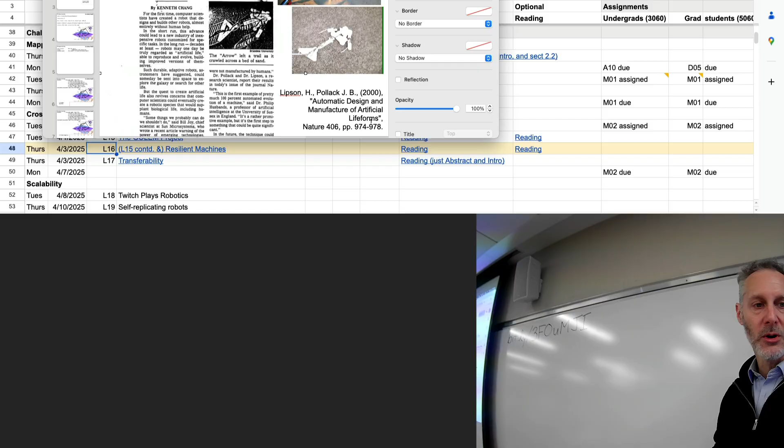We saw last time that in the GOLEM project, they're going to evolve not just synaptic weights for control policies in a fixed robot. They're going to expand their evolutionary algorithm to evolve both the body and brain of their robots. And we're going to see more and more of that towards the end of this semester.

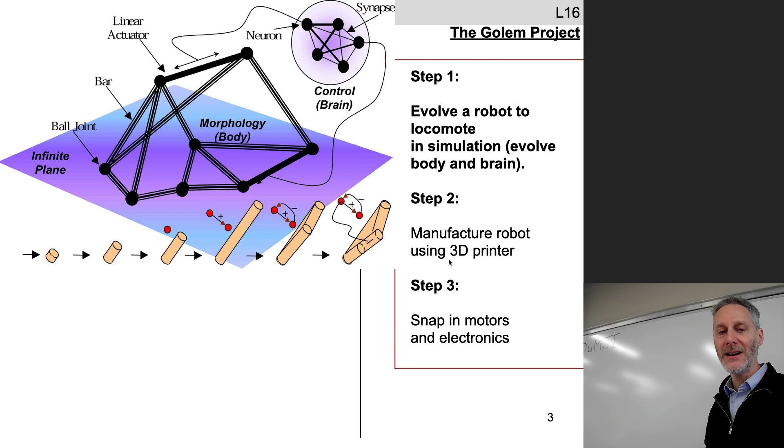Step one, evolve a robot to locomote in simulation like we've seen before by evolving body and brains. Step two, manufacture as much of the physical robot as can be manufactured by a 3D printer. And then whatever the 3D printer can't manufacture, snap that in manually. So partly automated manufacture of evolved robots.

Okay, we walked through the genotype last time. In the GOLEM project, there's a relatively complicated genotype-to-phenotype mapping. We started to talk about the evolutionary algorithm last time.

Instead of starting with random genomes, they start with null genomes. They have 200 null robots. Every single one of those 200 robots has no vertices, no bars, no motors, no neurons, no actuators, and so on. We ended last time by talking about the evaluation period.

How long does one simulation run? They have a CPG in one of these neurons. Every robot has its own CPG that emits a sinusoidal pattern that can be used by the motors, and that CPG is allowed to oscillate 12 times.

Some of those survive by chance, some of those are killed off, and then the ones that survive produce randomly modified copies of themselves.

What's the point of having half of them get killed off before any evolution takes place? Why make 200 empty genomes and then randomly kill off half of them? Seems like overkill. Why didn't they start with random genomes as we've seen before? Seems like kind of an odd experimental choice.

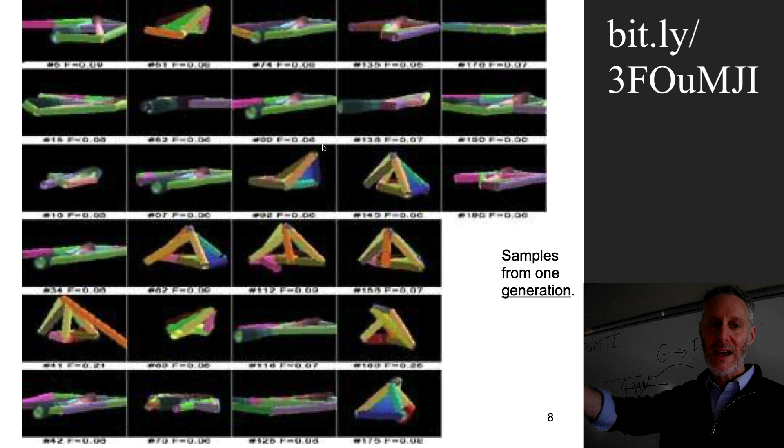Again, I apologize for the low resolution graphics here. Hopefully you can see—what we're looking at here is partway through the evolutionary process. They're doing a cross-section through the population of 200 robots partway through evolution, and you can see that there's a little bit of diversity in the kinds of bodies that are arising.

So we've got a population of different robots, but you can also see there's a little bit of common structure here. There are certain ways in which these body plans are able to move about.

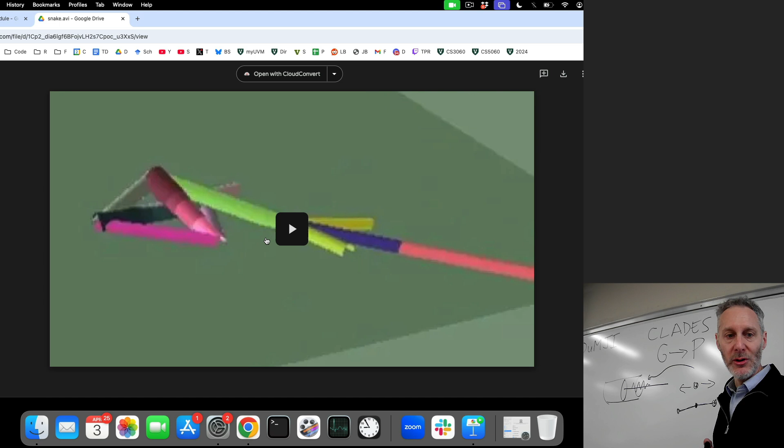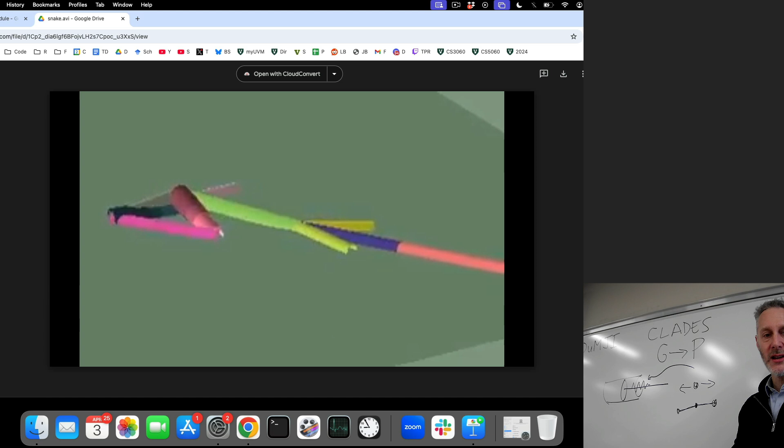You'll have to forgive the physics engines of this time, these were the very first physics engines. You can see they're not too accurate, there's a lot of interpenetration here, collision detection and resolution is a little rough. What do you think? Is this going to transfer from simulation to reality? I don't know about you, I'm not very confident. We'll see in a moment.

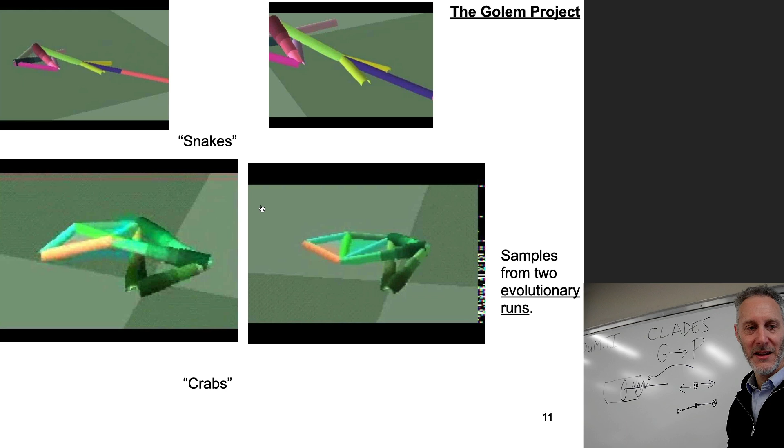This was one individual, and this was one of its cousins existing in the population. Looks similar, acts similar, not exactly the same. We should have a betting pool going: going to transfer? Yes, no, maybe. I see a lot of shaking of heads.

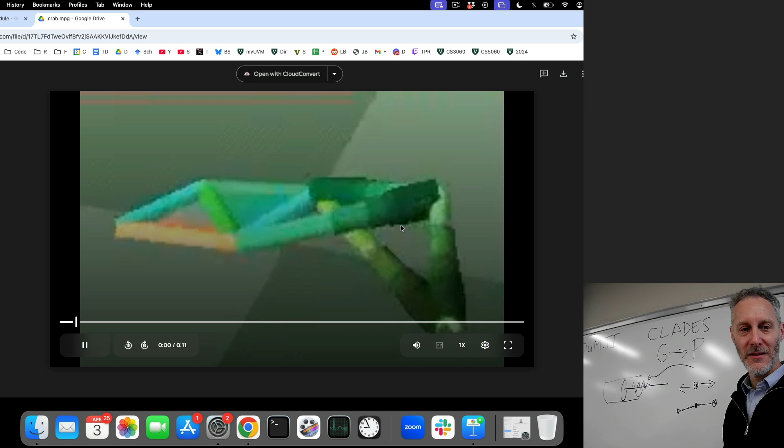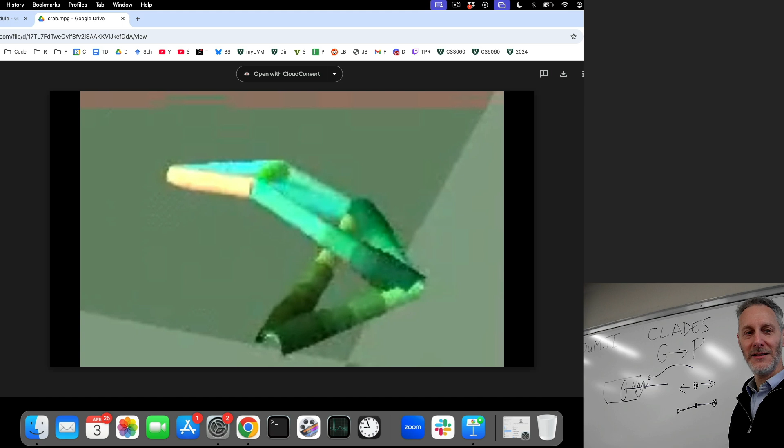Here's the crab. Yes, no, maybe, why not? All right, let's keep going. Another cousin of that one.

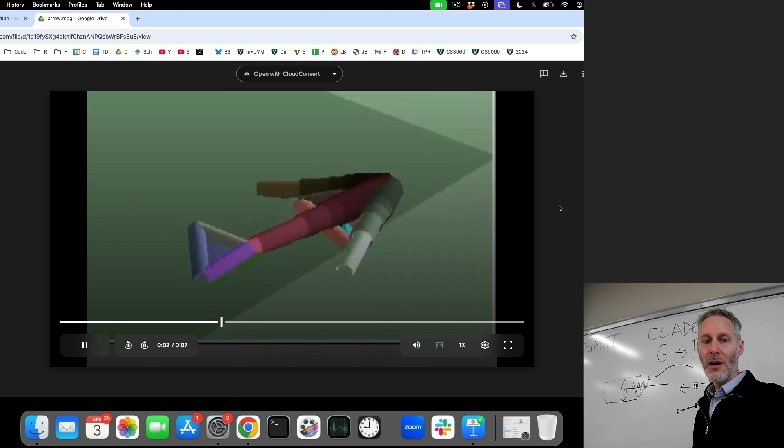Okay, let's see if I can play some of these. Here's the simulated arrow, and as pointed out, most of its motion is horizontal. You can see the friction modeling here, which isn't great, but it's good in the sense that it's slowing the robot down.

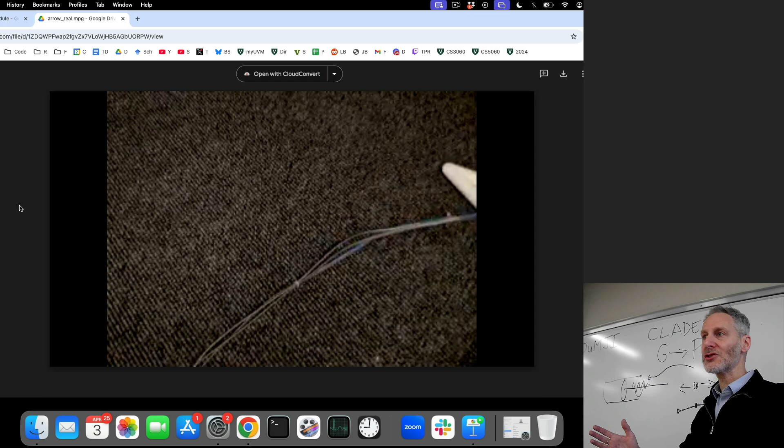That's the real arrow, still high friction. It's still doing more or less the same thing, exhibiting the same motion, moving in the correct direction, just slower. Not great, but okay.

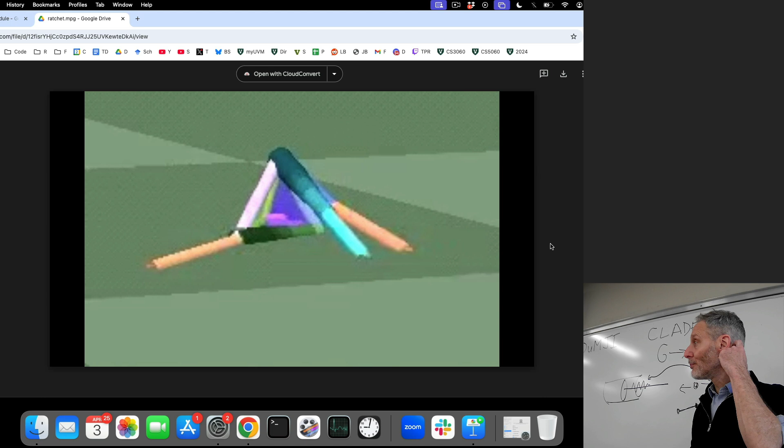Okay, the ratchet. It's pushing a little bit more vertically. There's more of a vertical component to the force acting on the ground, but clearly it's dragging a lot of its parts. You'll notice that the evolutionary algorithm has evolved to exploit the not-great collision detection and resolution. Let's see how this one does in reality.

Still a pretty simple machine. It's got kind of the right idea.

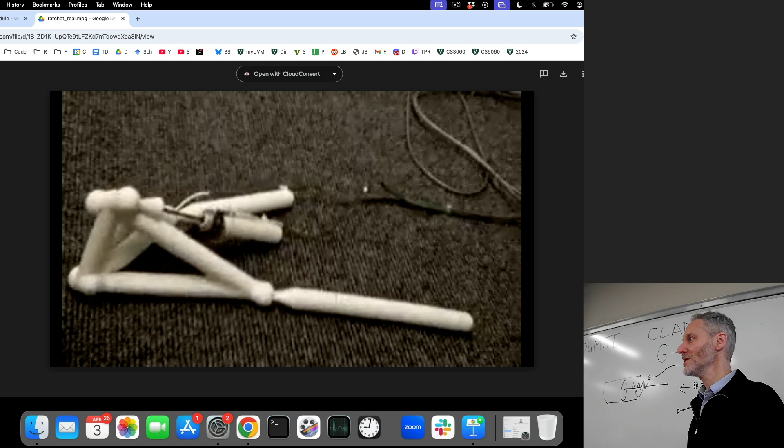Okay, and then finally, the tetrahedron. Vertical component of pushing. It's still dragging its components.

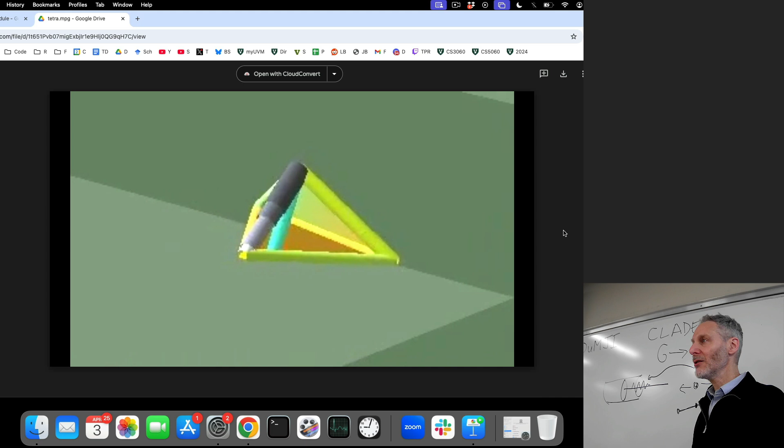What you can't see from this physics engine is that the total weight of the robot is being lessened. So it's still dragging the parts, but the parts are lighter when they're dragging.

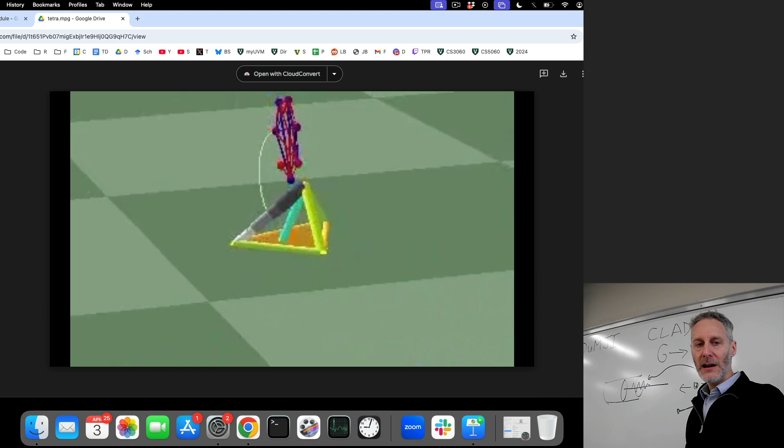They added in a visualization here so you can actually see the neural network brain at the same time. You can see the neurons firing, the synapses, and that white line sending a value to the motor neuron inside one of the actuated bars.

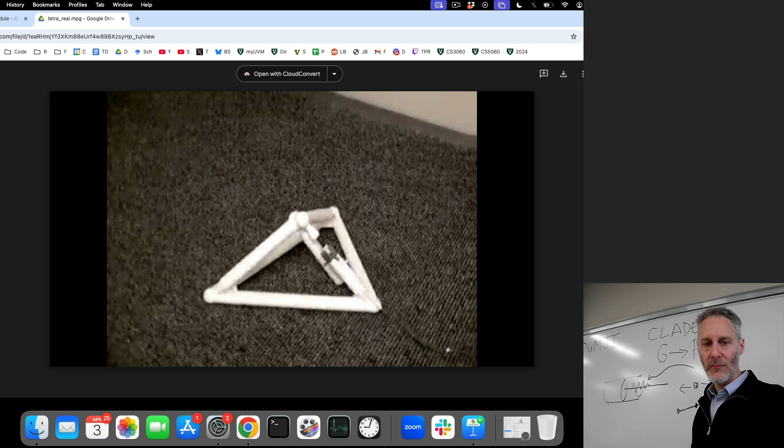They cheated a little bit. You can see the video sped up a little bit.

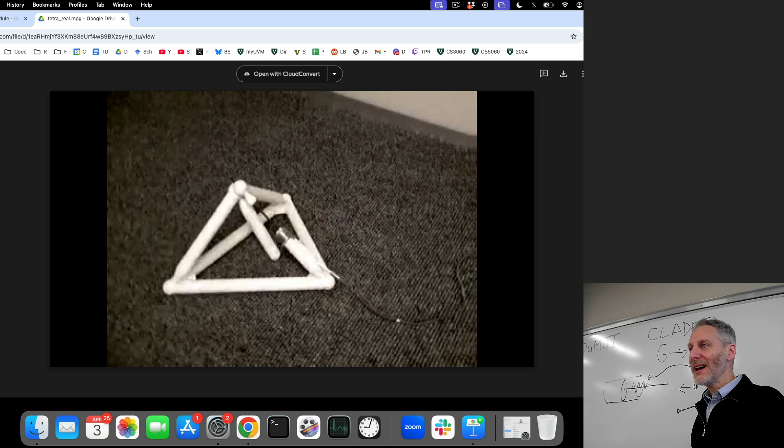Not the most complicated robots, but a demonstration, number one, that it is possible to cross the sim-to-real gap. And it is also possible, thanks to 3D printers, to automate the manufacture of these robots a bit.

So now that we've talked quite a bit about the GOLEM project, how does it try to solve the sim-to-real problem? It does it by assuming that, by creating diversity, lots of different robots with different form and function, hoping that at least one of them makes it across the gap. This is the radical envelope of noise hypothesis — the intuition is don't allow evolution to clamp on to inaccuracies in the simulation.

The intuition behind the GOLEM project: let's just make a whole bunch of them, and let's automate the manufacture of them so we can pump out a large number. And if any of them don't manage to cross the gap, throw them away, keep the ones that do.

Okay, so again, I mentioned a little bit about 3D printers. This is the very early history of 3D printers. You can see here there's a little bit of a nozzle. This nozzle goes back and forth over a horizontal plate and lays down some of this thermoplastic, which very quickly solidifies. You can see the robot being printed here, made up of these hollow cylinders.

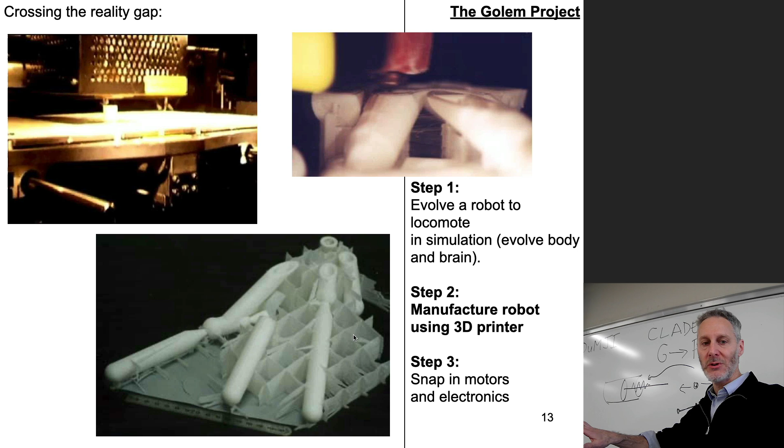You can see that depending on the geometry, the 3D printer needs to print a little bit of thin supporting thermoplastic structure. What they would typically do is print out one of these robots in the afternoon, then put it in a very lightly saline solution bath overnight, which dissolves away the thinner bits of thermoplastic and gets rid of the scaffolding, leaving you with the robot.

You'll notice that they came up with a relatively complicated and elegant geometric solution to create a hinge joint. The 3D printer doesn't print separate parts that someone then assembles — it prints the robot as one entire piece.

The nice thing about 3D printers is they can print relatively complicated and high resolution 3D geometry. So if you get the geometry right, you can print out things like 1-degree-of-freedom hinge joints. Here's the little electronics that they're connecting to the robot, and the robot kind of has to drag its brain along with it.

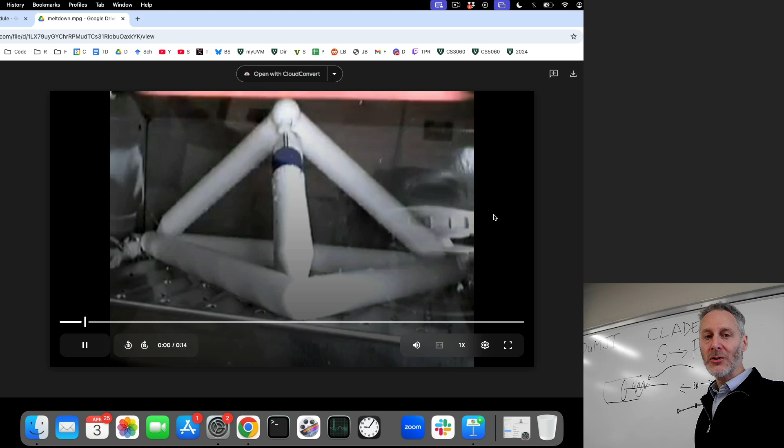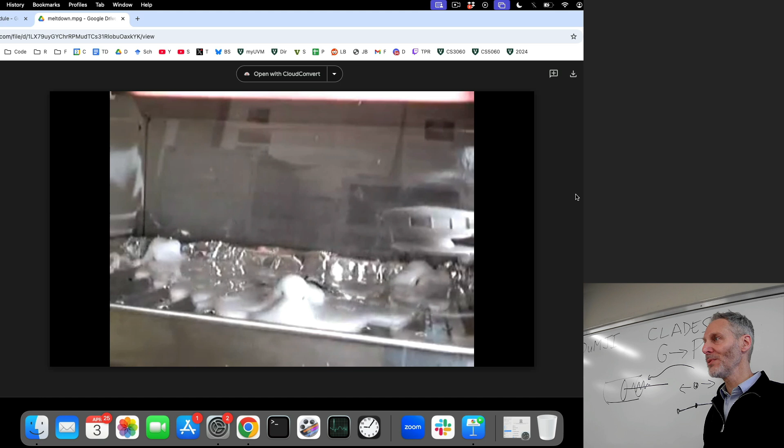At the time, people were thinking about what would be the use of these 3D printers. The idea was perhaps you could create recyclable robots — once the robot's done cleaning the leaves out of the eaves on your home, you throw it in your microwave, heat it up, melt all the thermoplastic, and send it back to the company, and it'll 3D print a robot for you.

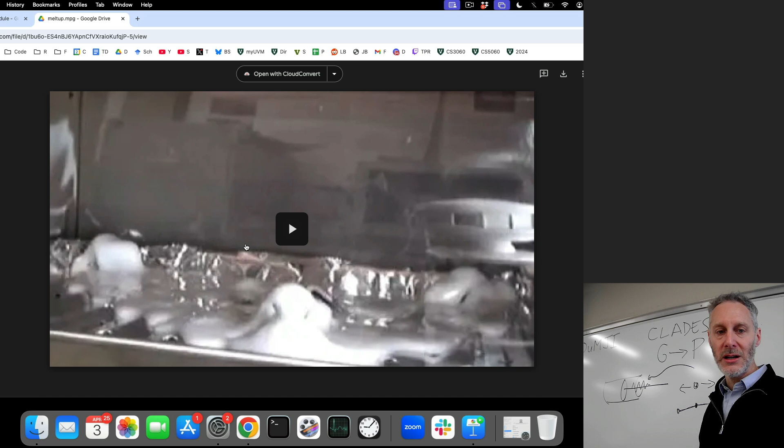And maybe you can even create a fancy microwave that builds one for you. These investigators were not without a sense of humor.

Okay, that was the GOLEM project, conducted at Cornell. I was there doing my postdoc when they were finishing up this project. One difficulty was working with these big, clunky 3D printers. So the investigators started a second project called Fab at Home, with the idea that you could perhaps open source 3D printing.

One of the things that led to the computer revolution in the 80s was the invention of personal computers, the idea that you could get people to buy a kit and put together their own computers, or buy a simple computer and use it at home. Nobody had any reason to think about why a computer would be useful for people at home.

People figured it out. So the idea in the early 2000s of the Fab at Home project was, let's try and get a 3D printer into everybody's home. How many of you have a 3D printer at home? Okay, that vision hasn't quite come about yet. Maybe someday.

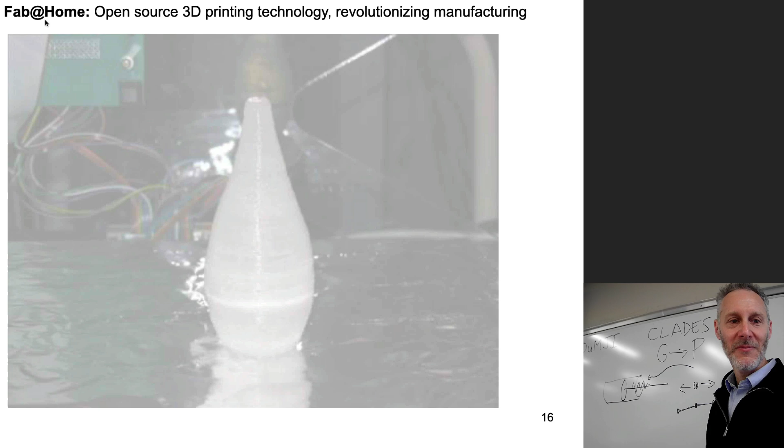There was another interesting idea at the time, which is maybe you could evolve not robots, but 3D printers. What might be the fitness function for an evolutionary algorithm that's going to evolve populations of 3D printers? What makes for a good 3D printer, a not so good 3D printer?

It's a factor of volume, quality, and speed. Okay, so evolved 3D printers that print stuff faster, print bigger stuff faster. Other ideas? Those would be good. Let's throw those into the fitness function.

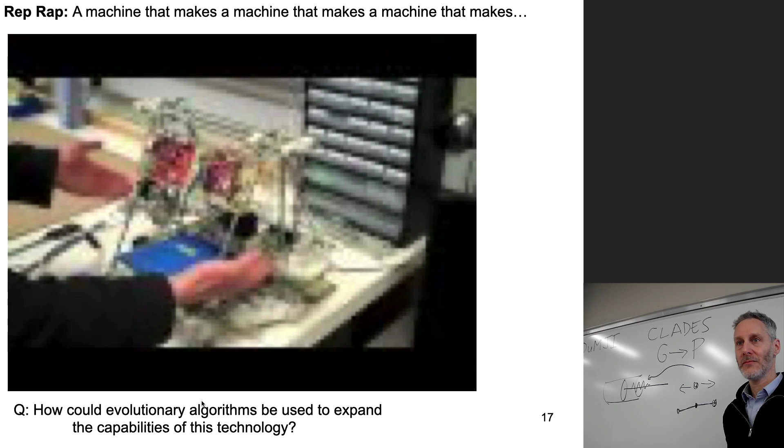Precision - how precise can you get it to print something out? As you can see, you sometimes need pretty good precision. If you're evolving 3D printers that print some or maybe most of their own parts, maybe you can include a term to your fitness function, which is the percentage of its own parts that it's capable of printing out. Kind of an interesting idea. Hasn't really materialized yet, but we'll see.

Maybe someday. Okay, that concludes the GOLEM project. We're now going to move on to lecture 16 and the Resilient Machines project, which had yet a different angle of attack to solving the sim to real problem.

To motivate the Resilient Machines project, let's go back to this slide, which we saw at the very beginning of the semester. Ultimately, we'd like to have robots that we can automatically design in a supercomputer, automatically manufacture them with 3D printers, have them go out into the world, but then the world is going to change around them. What do we do at that point? Do we go back to the drawing board and re-evolve robots in simulation, manufacture them, print them out again? Do we somehow try and evolve robots that can do on-site training? They can learn on the job. How do we deal with the fact that things are always changing?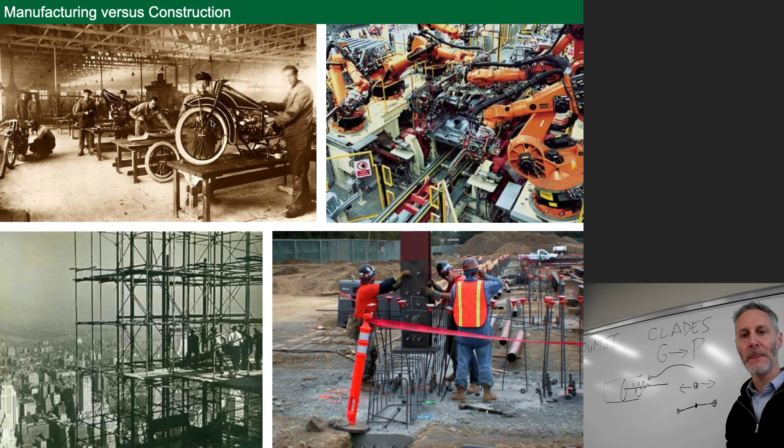If it suffers an injury, like, for example, a grad student going in with a screwdriver and mechanically removing the lower part of the robot's leg, what worked before no longer works. So the robot is going to have to readapt somehow. The task is still the same: move from left to right along the table.

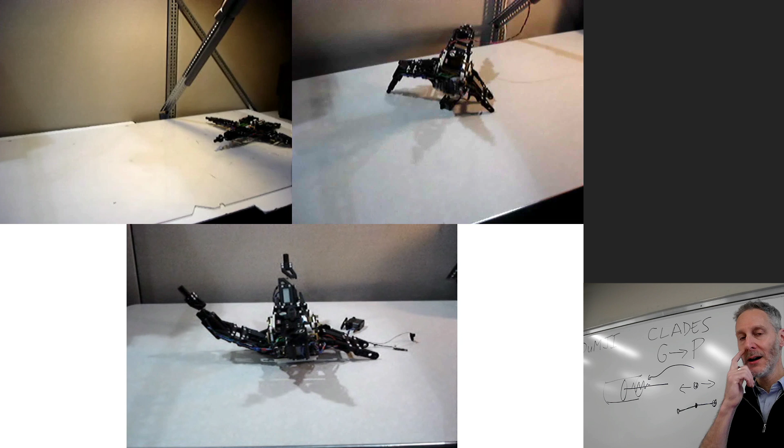In the GOLEM project, they were tackling the sim-to-real problem, but they were also tackling the scalability problem: how do we pump out large numbers of robots? In the Resilient Machines project, the investigators were also trying to solve the sim-to-real problem, but also another problem: can we keep doing sim-to-real? Can the robot, or can something or someone, keep evolving simulations or control policies and keep sending them to the physical robot so that if something happens, it just keeps going, pumping out controllers and adapting to changes to the robot and its environment?

Okay, we're going to dive down into the details and see how this works. Before we do, let's look at the rationale, what led up to the reasoning behind the Resilient Machines project. As we've seen many times in this class now, standard evolutionary robotics paradigm: evolve controllers for robots to automatically discover good behavior. There's several ways to do this.

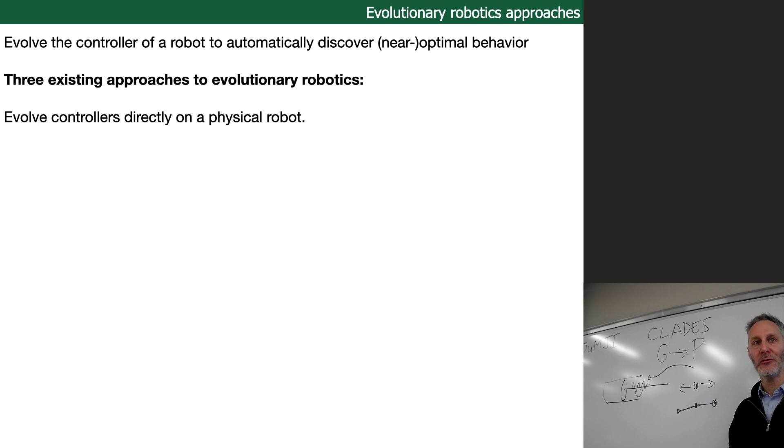The first way that we saw back at the beginning of the class, before there were simulators: evolve hundreds or thousands of controllers directly on the physical machine. That has an obvious limitation. What is it? The microcontrollers on your robot probably don't have the power to run some of these advanced algorithms. Possibly, maybe we can't do the evolution on the microcontroller. That's true, we could do that today. Why aren't we doing this in this class? Why aren't I giving you a physical robot and telling you to go home and evaluate thousands of controllers on your robot? Scalability. Scalability how? You can run a lot more simulations a lot quicker than if you have a robot setup, because you can parallelize and you can also run faster than real time.

Absolutely, right? For most of you, hopefully your simulations are running faster than real time. Whatever your final project is, imagine trying to do it without a simulator. You had to just download controllers, thousands of them, onto your physical robot. So there are obvious limitations to this approach.

So the obvious alternative, once physics engines appeared, is to create a physical simulation of the robot, do all of the controller evolution in simulation, and then cross your fingers and hope for the best that things transfer from sim to real. What's the problem with the alternative? Again, why am I not giving you a physical robot and having you all try to transfer your evolved controllers from simulation onto your physical robot?

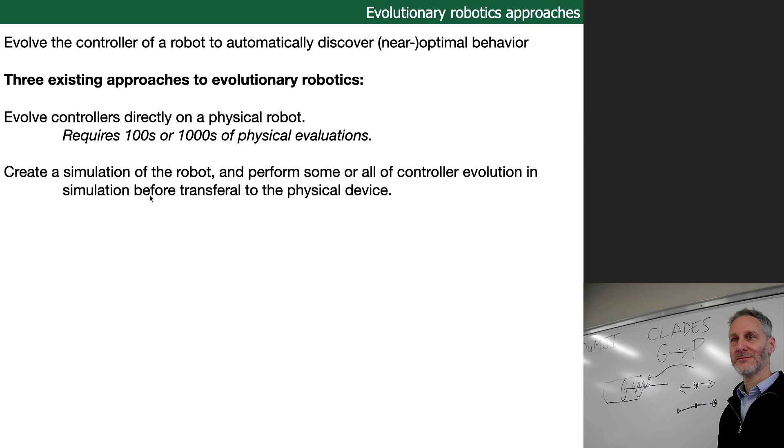Mind the gap, right? How do you know that what you evolve in simulation is going to work in reality? Not only that, there's the reality gap problem, but you've also got to make the simulator itself. In this course, I gave you most of a physics engine, and you had to build a bit of stuff on top. For the students who took this course for graduate credit and did the differentiable simulations, you built a differentiable simulation from scratch. It takes time and it's non-trivial.

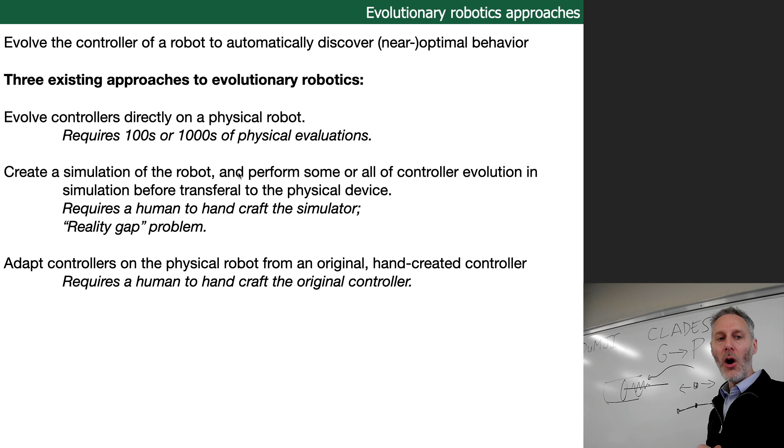So is there a third approach? There is actually a third approach, which we haven't talked about in this course yet: design a hand-created controller. Take a physical machine and try to work out the rudiments of something that works, and then adapt that hand-designed controller on the robot, using reinforcement learning or some ideas from machine learning to fine-tune the controller on the physical robot. Tricky to do, because even handcrafting an approximate or clunky controller is very difficult, very non-intuitive to do. So all of the approaches to automatically designing behaviors for robots have flaws, shown in italics here.

So the investigators in the Resilient Machines project came up with a different idea, and it goes as follows. Let's assume we already have a physical robot. So this is not the GOLEM project, we're not going to be evolving robot bodies. We have our quadruped robot that you just saw. We're going to let that robot just move around in its environment, no evolution, no simulation, just do stuff and generate a bunch of sensor motor data.

When I push with this motor, I sense myself rotating to the left. When I push with this motor, I sense myself rotating to the right. Collect a whole bunch of that type of sensor motor data, and then use all that sensor motor data to evolve not a robot in a simulator, but evolve the simulator itself. If simulators take so much time to create by hand, why don't we just evolve populations of simulators? We're going to evolve, as you're going to see in the Resilient Machines project—that's exactly what they did, they evolved those simulators. What is the fitness, do you think, of any given simulator?

We've just collected a whole bunch of sensor motor data from the physical robot. Now we're going to set that data aside and start to evolve populations of simulators. What makes for a good or highly fit simulation compared to a bad or low fit simulation?

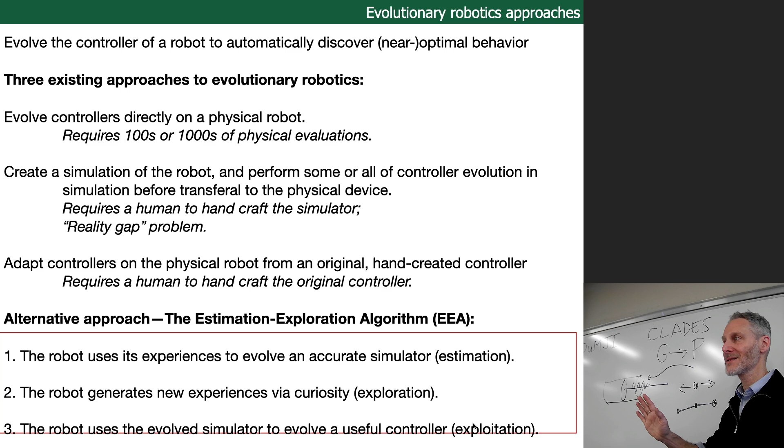So the investigators originally called this algorithm the estimation, exploration, exploitation algorithm. It's a horrible name. It's become known in retrospect as the Resilient Machines project, and we'll see why the resilient part is in there in a moment. We're going to walk through the Resilient Machines project in a moment.

I've been mentioning the investigator several times—I'm the investigator. This was the project that I worked on as a postdoc at Cornell. So all of the inelegant aspects of the experiment, you know who to blame.

Okay, here we go. Here's our robot. Remember, we're going to start with real. So we've got this quadruped robot. We want it to walk forward. We want it to climb stairs. We want it to push the leaves out of the gutters on our home. Whatever it is we want it to do, we've got the fitness function—what we want it to do—but we don't have a controller for it yet. We don't have a way for it to do whatever we want it to do, and we don't even have a simulator yet. So we're starting from scratch.

The robot is going to have to evolve a simulator, and it's also going to have to evolve an explanation of itself in the simulator. How are all these parts put together? This physical robot has no camera. It can't see itself. It doesn't know that these 9 parts are put together in this way. For all this robot knows, these 9 parts are attached together in serial, and it's a snake robot, or it's a biped, or it's something else.

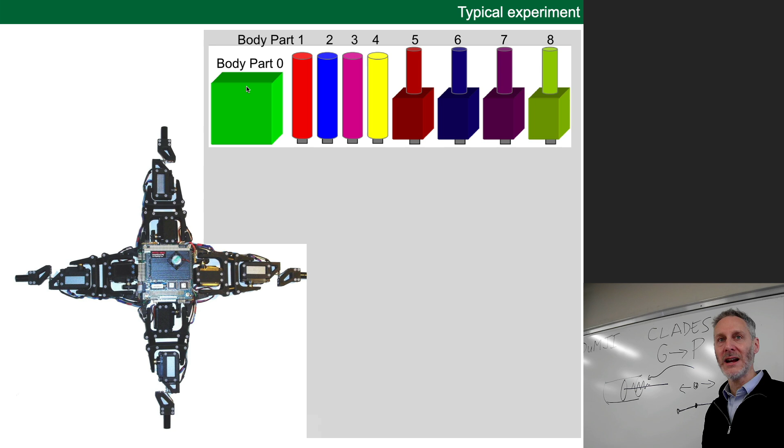In this experiment, we tried to give the robot as little knowledge of self and its environment as possible. We wanted to try and evolve an explanation of self and its environment on its own, because it takes, as you now know, hours and hours and hours to program all of this by hand. As I mentioned in the Resilient Machines project, we're going to start with real and work backwards to sim. So we start by letting the robot perform random actions. Let me see if I can put this on loop.

Okay, if not, I'll just do it manually. Here's a random action the robot chose to perform.

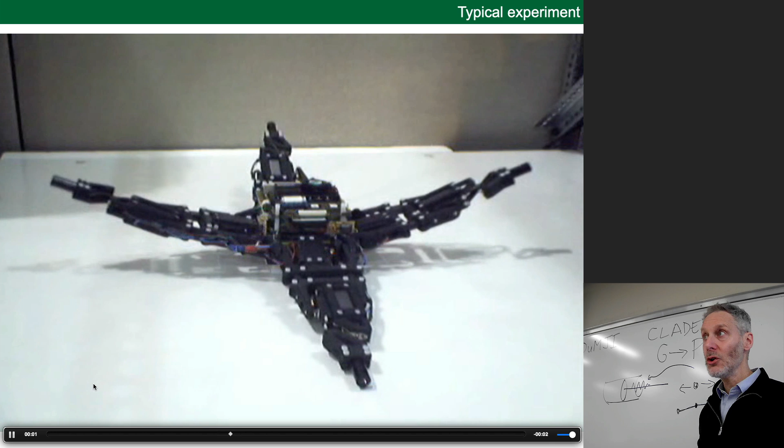Like your quadruped from assignment 10, this robot has 8 motors, and in this case it just happens to rotate motors 1, 2, 3, 4, 5, 6 upwards, and 7 and 8 down by a small amount, just by chance.

The physical robot had 2 sensors on board, 2 vestibular sensors. The first indicated how much the robot's torso tilts left and right, and the second reported how much the body tilts forward and back. So 8 motors, 2 sensors.

Usually when we talk about neural network controllers for the robot, we talk about sensor values arriving at the neural network, propagating through it, motor values arriving, and the robot does something. Sense, think, act. In the Resilient Machines project, we're going to look at the other half of this loop: act and sense the repercussions of your actions.

This robot has no camera, but it now 'knows' that when it rotates motors 1 through 6 up and 7 and 8 down, it feels itself tilt 20 degrees forward. That's one data point it has: I did this and I got this sensory result.

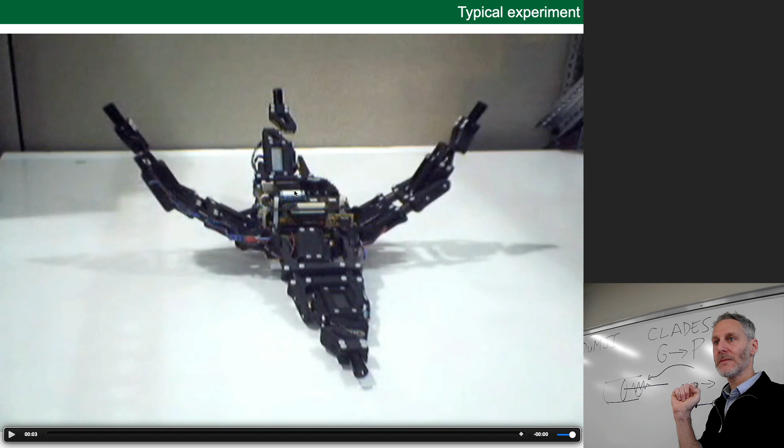The physical robot is now going to rest, pause, and start thinking. What do I mean by thinking? It's going to start evolving simulators.

Every half-second animation you see here is one simulation. You'll notice some aspects of the simulation are always the same: it's always on flat ground, the friction parameters are always the same. So when I say we're evolving a simulator, some aspects of the simulation are fixed.

In the years after this experiment, we also put aspects of the ground under evolutionary control. The robot could evolve simulations with flat ground, rugged terrain, ramps, stairs, other robots, you name it. In this very first attempt, we kept some things constant.

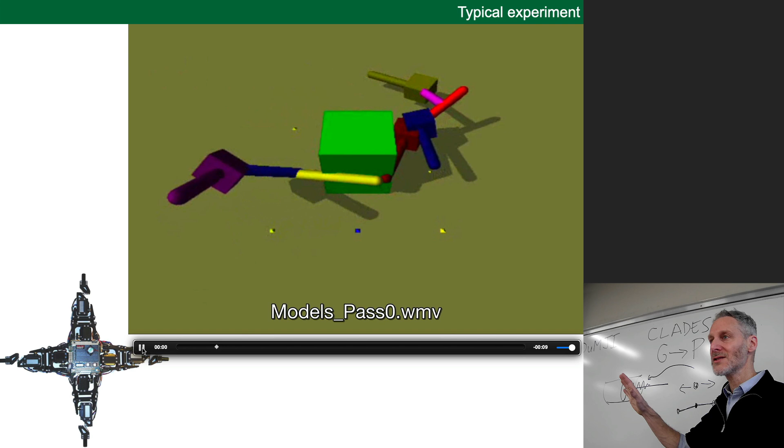You can obviously see what is changing in the simulation: in each one of these evolved simulations, the way in which the robot is put together differs.

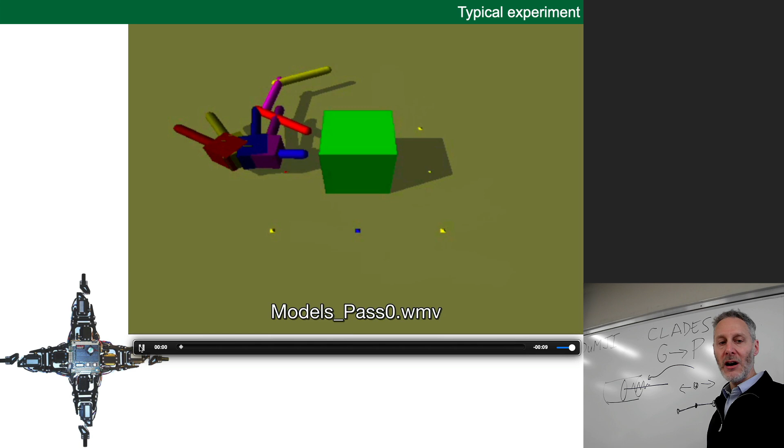If you watch carefully, you'll notice that towards the end of this video, the green torso is rotating 20 degrees forward. The simulations are evolving to recapitulate what the physical robot experienced.

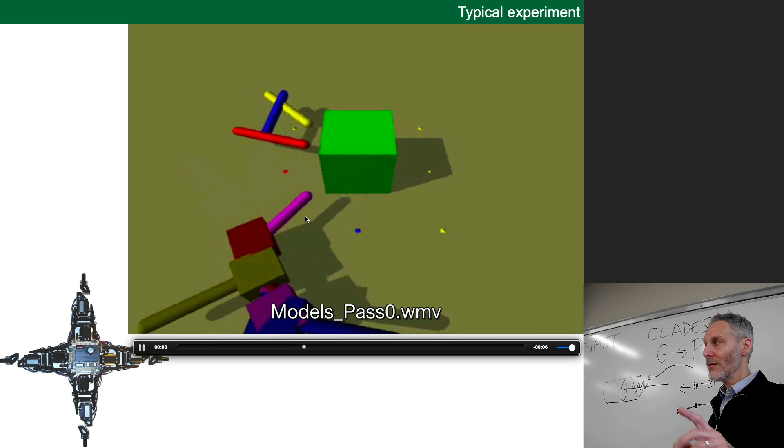Each one of these simulated robots is running the same controller that the real robot ran. But for most of these simulated robots, when it runs that controller, the torso does not just rotate 20 degrees forward—it rotates differently. Those get low fitness, they get deleted, and the simulations in which the robot tilts 20 degrees forward stay and produce randomly modified copies.

At this point in time, at the end of this evolutionary period, the physical robot says, I'm done. I have an accurate simulation of myself. I know how I'm put together because I can run the same controller in reality or simulation and get the same result.

Is it done? Obviously not, right?

Actually, the real robot does know that it's not done because, though it's a little difficult to see in this video, in this population of evolved simulators there are many different simulated bodies that rotate the torso 20 degrees forward. The robot doesn't know a lot, but it does know that it can't be built like this, and built like this, and built like this—it's only built in one way.

So the real robot says, you know what, this was too easy. I found lots of different descriptions of myself that explain what I experienced in reality. So what do you think the real robot does at this point?

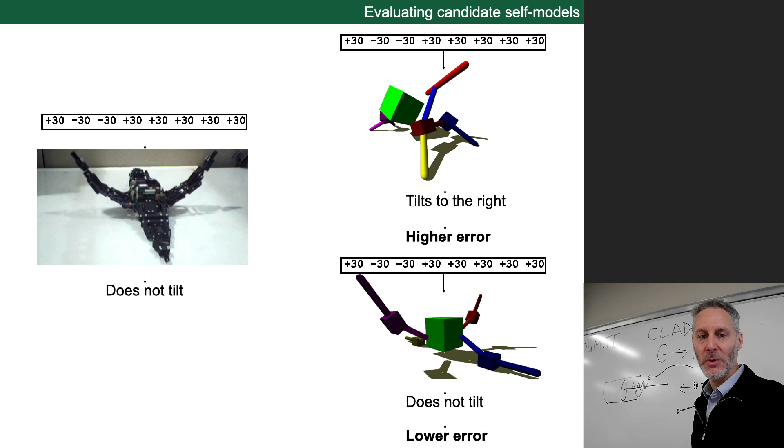Move in a different way, right? Remember the exploration part, the curiosity part. So it performs a different action.

In this case, it rotates motors 2 and 3 down and most of the other motors up, and the torso tilts 40 degrees to the right.

Now the real robot has in hand 2 data points. I did this earlier and I rotated 20 degrees forward. Then I did something else and now I rotated 40 degrees to the right. What do you think the real robot is going to do at this point?

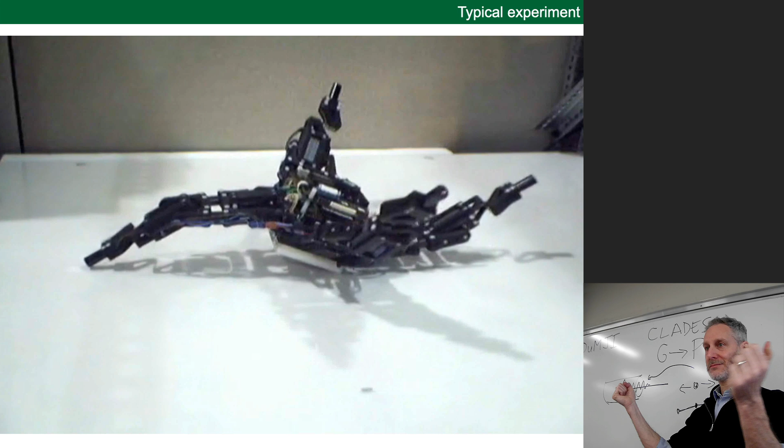We've gone from real to sim, back to real. What do we do at this point? Go back to simulation, and we continue running the evolutionary algorithm. We start with the same evolved population of simulations we had before, but now each simulated body is evaluated twice: once with the first controller from the real robot, and a second time with the second controller. Now the evolutionary challenge is more difficult. Each virtual robot has to explain both physical experiences.

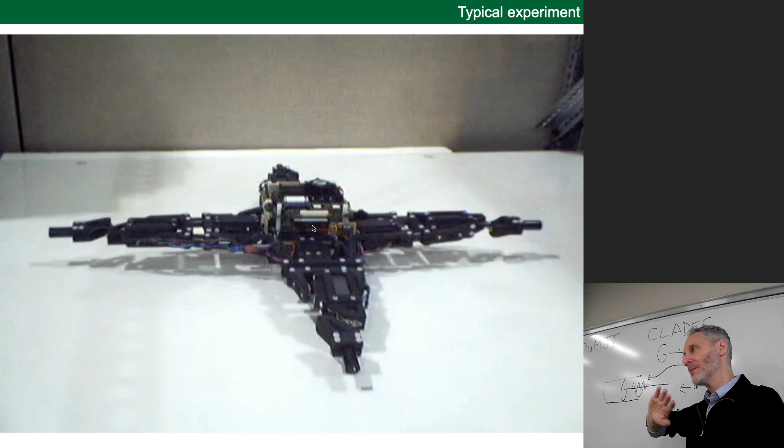So we've gone from real to sim and back 8 times. This is the 16th visitation to reality. Same experiment you've just seen, but I'm skipping over 9, 10, 11, 12, 13, 14, 15. This is the 16th thing the robot tried. And when it goes back to sim for the 16th time, this is what's in the population.

What can the real robot conclude at this point? The real robot says: I don't know, I keep getting more and more experiences from the real world, and every time I bring those experiences back, my understanding of myself explains them. I keep doing a whole bunch of different things, and nothing I do seems to break my understanding of self. And by the way, I only have one understanding of self. Most of the simulations in the population at the time look more or less like this.

I remember when we got this data, I was pretty happy. This looked good, looked like things were working, but I was also pretty nervous because you'll notice that all 4 of the legs are bent. It's not perfect, right? We've seen this many times now — an evolutionary algorithm is not an optimizer, it's a satisficer. It doesn't get things perfectly right. I thought with more and more real-world data, it would clean up these little bends in the legs, but it never did.

Why not? If you can't figure it out, it's okay — it took me a little while to figure it out too. It doesn't really seem like the bends are contributing to what counts as satisfactory to its sense of self. It only senses tilt, and that's not... yeah. It's matching the data from the real robot very well, and yet the legs are bent. So maybe the bend in the legs doesn't make much of a difference. It makes some. I thought eventually the evolutionary algorithm would clean up these bends and get rid of this last little inaccuracy. It didn't.

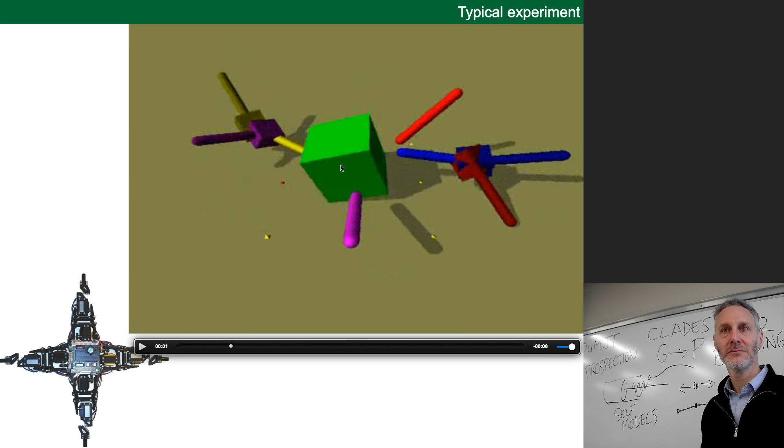Is that a good action or a bad action? It would be bad. Why? Because it wants all the self-models to maximize the differences between the self-models' predictions.

Bingo. A good prospective action is one that generates a variance in prospection. You want all the self-models to disagree.

The reason little kids go to the edge of a cliff and go like this is because one part of their brain is saying, you're gonna fall off the edge of the cliff and mommy and daddy's gonna be really, really mad. Or it's not actually a cliff, it's a curb, and if I jump off, I'll be fine. I don't really know, so I'm gonna do something. I'm doing an action, and the reason I'm doing that action is because in my head, there are different guesses about what the result is going to be.